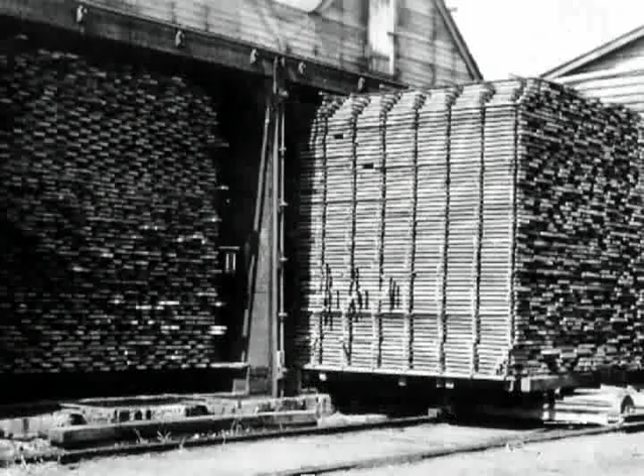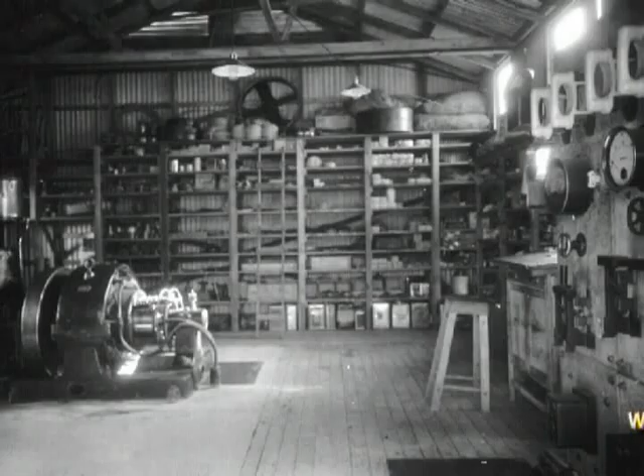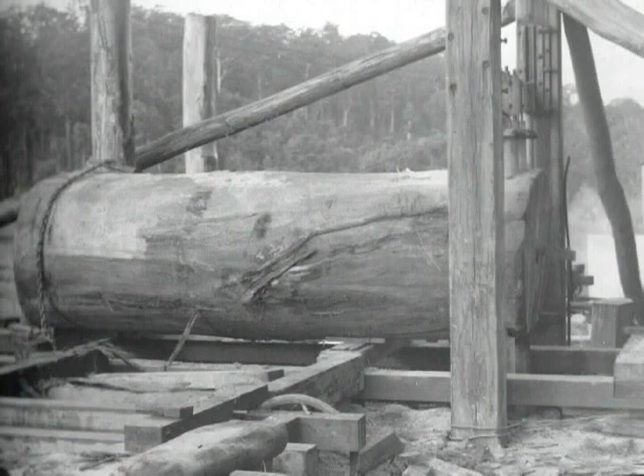The sawmill was the most modern ever built in Australia in its time. It used the steam from steam engines for kiln drying the timber. Up to 200 people were employed directly and indirectly with the mill. In the 1930s, the Depression in Australia, the Beals family sold their share to Tom Timms.

Let's go back to Tom and Doris's early days, back to the early 1920s, not long after they were married. Timmsvale had a long stretch of water in the Little Nymboida. In those early days, the farmers found they could sell their trees on the property. Bullock teams were used to get the logs from the eastern Dorrigo down to the jetty at Coffs Harbour. Tom was a good businessman, and he had 4 bullock teams.

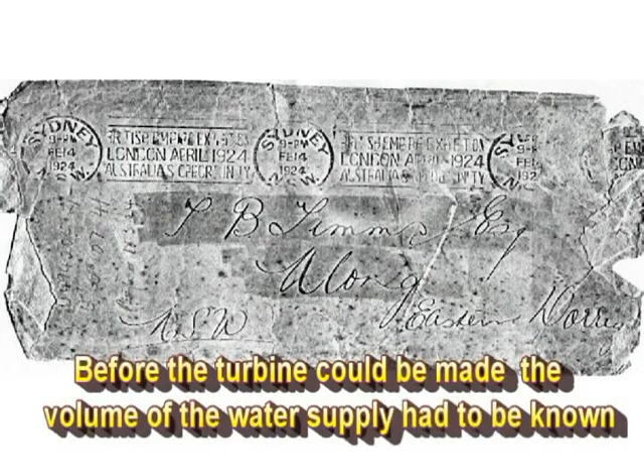He went to Dorrigo in 1921 with his wife Doris and his 2 children, Dudley and Jess. They were going there for the opening of the Dorrigo power station, which was run with a water turbine. Tom was very impressed by what he saw, and he kept thinking about a water turbine to power a sawmill. He believed he had what was needed, a river and a fall in height from the dam to the mill.

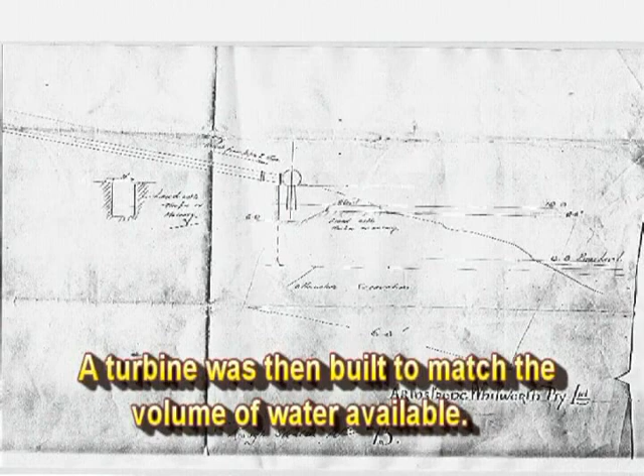Although Tom hadn't spent very much time at school, he began to write to the same firm in England that had supplied the Dorrigo hydroelectric water turbine. The English firm told Tom what would be required to drive the turbine which would power the sawmill. On the 28th of September 1923, he heard from the English company.

Timms at Timmsvale wants someone to work in the mill, so I hopped on the horse and off down to the mill. On straight away. Now, what sort of mill was that? That was a watermill, run by water power. Fairly unique mill in the sense that it was the only one in Australia as a watermill. Right? That's a fact, yes. How did the watermill work, Dick?

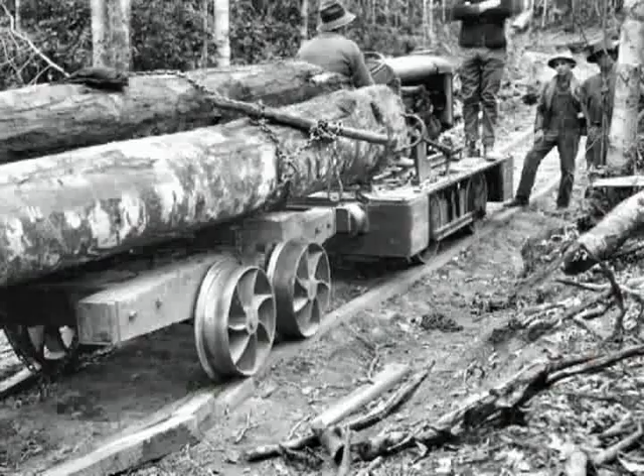Was there enough power in it? Yeah. All the power in the world. Power to spare, as a matter of fact. What about water shortage? Did you ever have any problems? Well, a couple of times while I was there, dry weather, there was more water going out than what was coming into the stream. They used to have to close down, about an hour perhaps or more, for pressure to build up, and away they went again. Where did the turbine come from? I think that was imported from England.

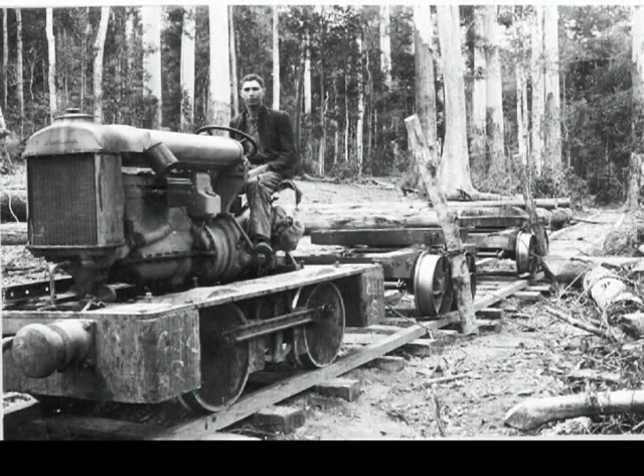What about sticks and eels going down through? Oh, if an eel went down, matter of fact, while I was there, I had a bit of a problem a couple of times with eels. They'd go down, of course. That'd gum things up. Had to take the turbine to pieces to get the eel out. This is back in 1925, at this little watermill at the back of Timmsvale. How many men worked there?

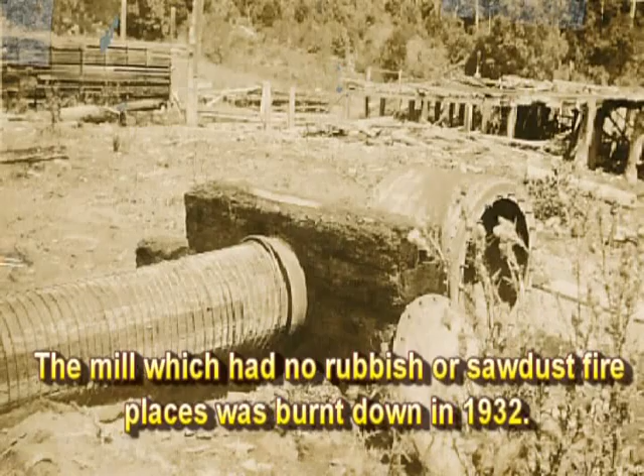Well, actually, there was the log yardman, benchman, friction man, tailor out, dockerman. What were some of their names? Oh, my gosh. There was Dan Davison, I remember, was the sawyer. Dick Parker was tailor out. Yours truly was driving the friction. Jack Stride was saw sharpener. Arthur Phillips, log yardman. Bill Heron, timber stacker. He was usually called Billy Beatles. Were they a happy crew at that mill? Oh, real tip-top. Great lot of chaps.

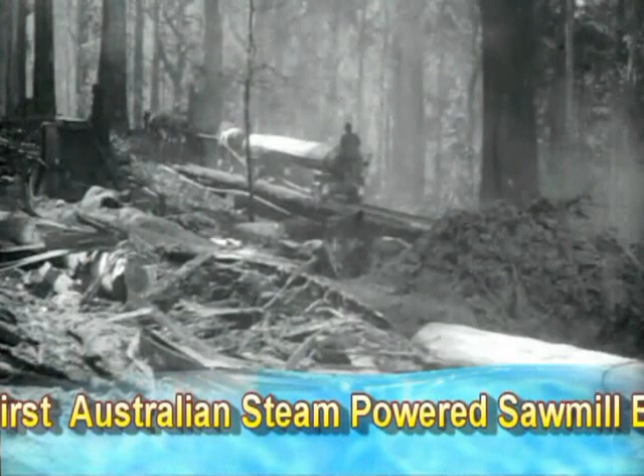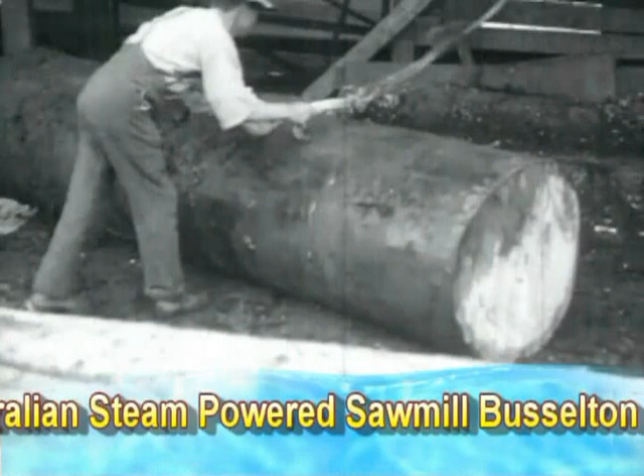After the timber was sawn, what happened to it then? Well, that was put out in the yard. A lot of it was stacked up. And when it was ready to go away, they used to bring the bullock wagon down into the yard and have a man up on the top stacking the timber, one man tallying and another chap handing it to the fellow on the wagon. And where'd the wagon take it then? Into Ulong. The line was through then? That's right, yes.

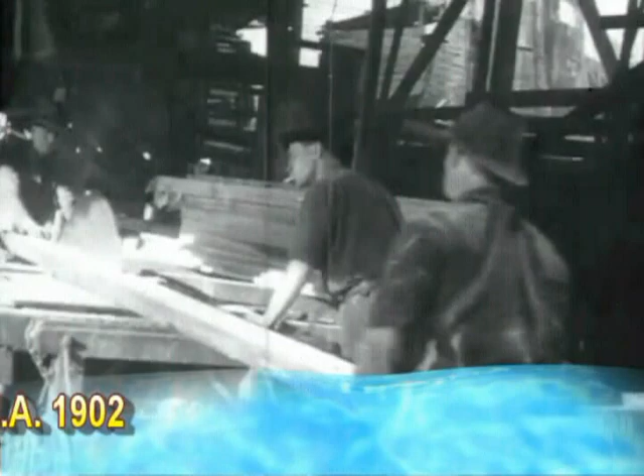And what was the timber like? It was all softwood. A lot of sassafras, more coachwood than anything. Beautiful timber, beautiful big logs. What did they use that timber for mainly? A lot of it was cut on the quarter. That used to go to the railway workshops in the city. And a lot of it went to Victoria, to the International Harvester Company. Any bad accidents? No.

There was a board door across here that you lifted out to let the water through. It always had to be shut off every afternoon to let the water build up in the dam as high as possible overnight. Until the next morning the boards were pulled out and let the water away again.

But this first part of here must have given them a fair bit of trouble. It was boarded up along there as I remember it. And from just not far ahead, it just ran as a canal. That's an overflow that they put in especially to take the pressure off the reservoir, which is only just there. When they wanted to work on the reservoir, they let the water through there and out of the road.

And on the base here is one of the bearing situations. There's another one over the other side where from the turbine there was a belt drive through to a shaft here which used to drive the frame. And the water coming through from there worked through those flippers and exhausted down through underneath. No, you didn't. Right out the side. But those brass flippers used to keep the show going till the eels got in.

See, there was a shaft through there, and as the thing started to gather speed, those governors had cut the flippers back. Oh, I see, change the angle. Yeah. So you can alter your pitch to whatever you want. Couldn't run too steep a pitch, would be too savage, would it?

The water used to exhaust out through there, down that canal to the creek. The mill elevator from the mill went out there and was supposed to go the other side of where the water was flowing out. Finally, the rest of the timber went out this way. There was a tram line running out here, up so high, out probably nearly 100 yards. And the timber was taken out on the tram line and stacked and stripped out beside the line.

Dudley Timms, another son, left Timmsvale and built a caravan park at Repton. It is now called Repton Gardens. While he lived in Timmsvale, he also had a bus company with 3 buses. After selling the caravan park, he decided to build a replica model of the Watermill. After a few friends had seen what he had done, he was talked into showing it at the 73rd Coffs Show. From there he was invited to many North Coast shows.

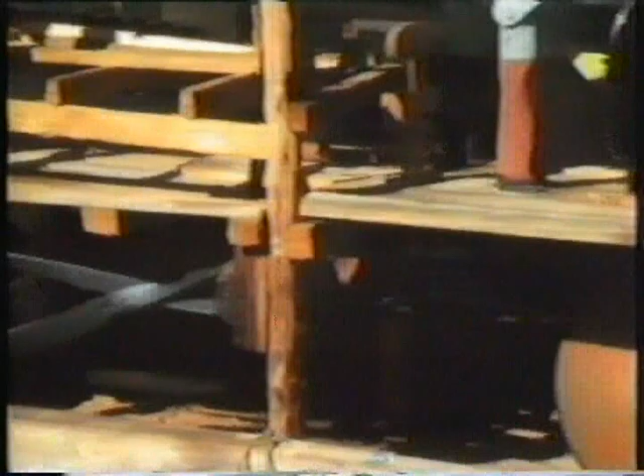After Dudley appeared in the government pavilion at the Sydney Royal Easter Show, he travelled around New South Wales and Queensland, as far in Queensland as Townsville and Charters Towers. He showed it at the Windsor Show, Western Sydney. Dudley was really talked out after these shows. There were always plenty of ex-timbermen who wanted to talk about those old sawmill days. Many of them grew up in the timber villages.

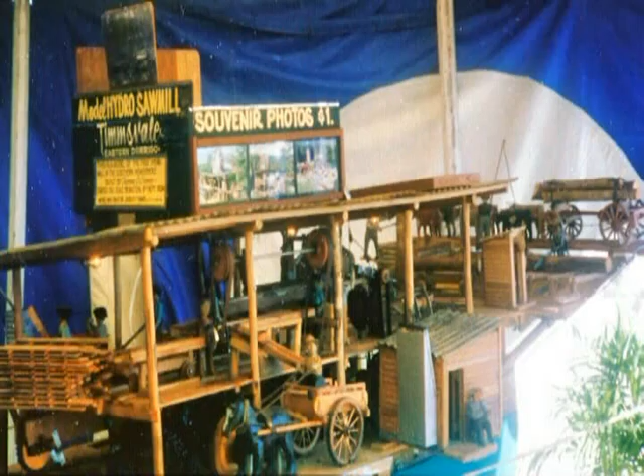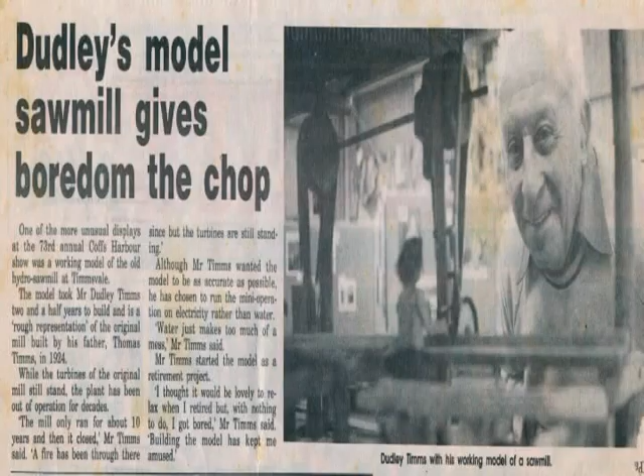Showing the miniature sawmill around Queensland and New South Wales, Dudley also met many people who once worked on the Eastern Dorrigo. There were some great memories relived. There are other people who worked in sawmills but not on the Eastern Dorrigo, but they wanted to show their grandchildren and point out the job they had in the sawmills.

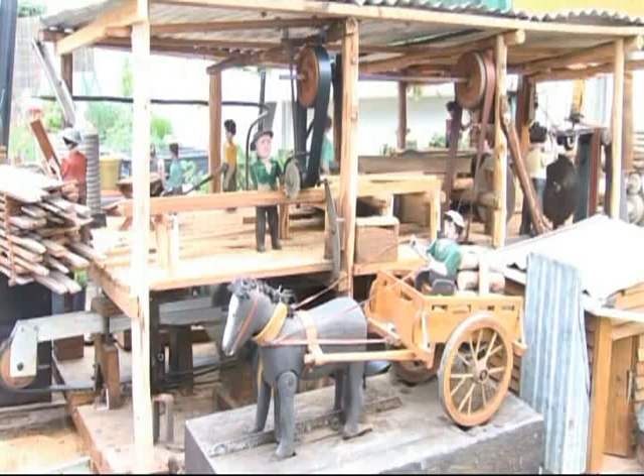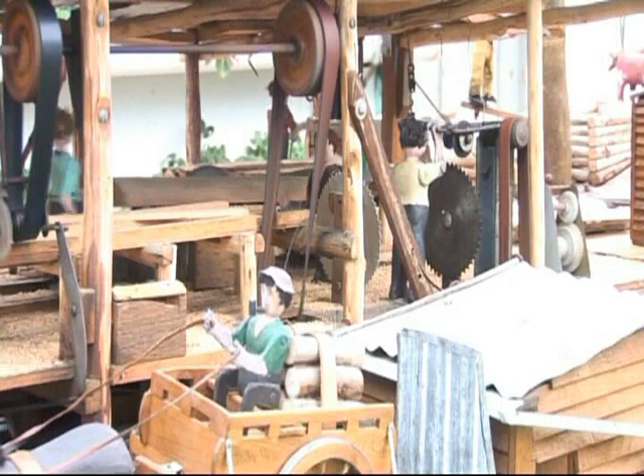It was asked if the Dudley Timms miniature mill could possibly be shown at the Coffs Harbour 100th year show. It had been nearly 20 years since this miniature sawmill had been switched on. A number of the posts had crumbled after white ants had infested them, but other posts and parts were in good condition. It was decided it was possible to have it ready. People have always enjoyed looking at the miniature sawmill, and they like to show their grandchildren. We knew the effort would be appreciated.